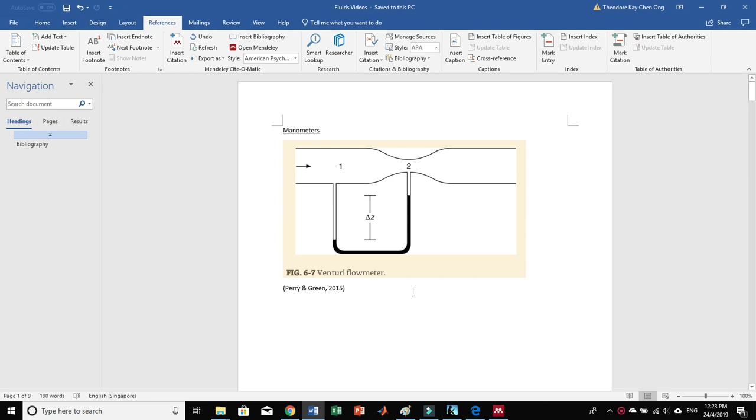I assume you should already have some experience with it, and that the pressure here should be equal to the pressure here. This should be pretty straightforward, part of the prerequisite knowledge, but this is just a recap of how to read manometers in case you don't know. If you already know, you can skip, and if you're not interested in the example problems for exams, you can also skip.

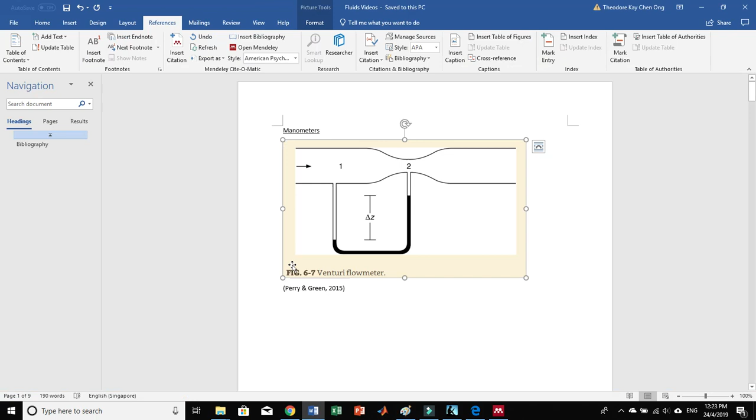So I took this from Perry's, as I was saying before. To read it, I'll draw one straight line across here, and say the pressure here equals the pressure here.

So what's the pressure at point 1? The pressure at 1 equals the pressure at 2, since the pressure here equals the pressure there, plus rho g delta z of this dark colored fluid.

This is of course assuming that the pressure in the flowing fluid is negligible, or rather the density of the flowing fluid is negligible compared to P1, P2.

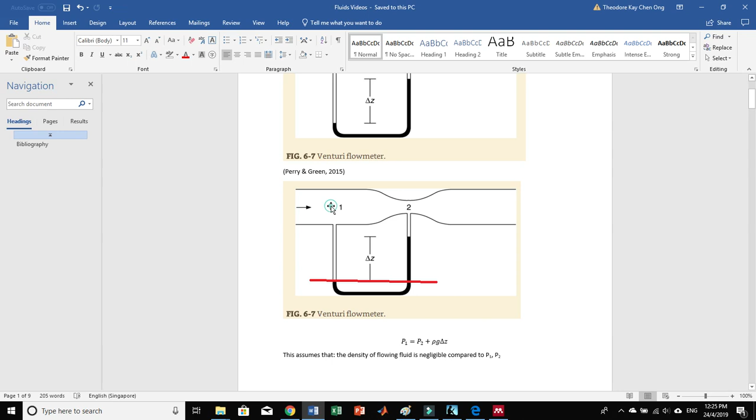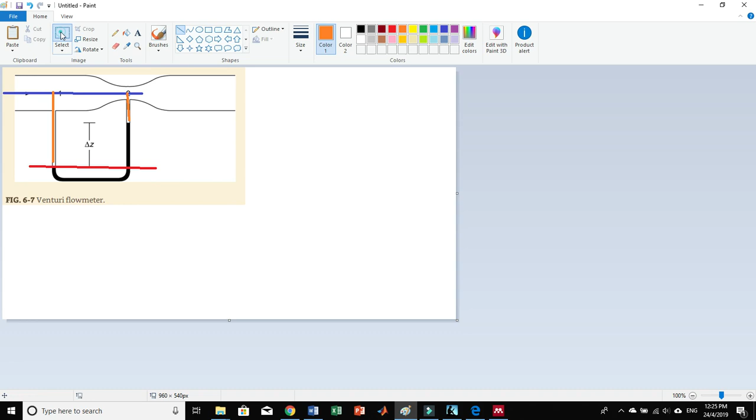Of course, if this flowing fluid was water and this dark fluid is mercury, then you may want to factor in some of the fluid height from here to here. So I'm going to draw a line from here to here, and then we'll want to consider the fluid height here and the fluid height here if the density of this flowing fluid is not negligible.

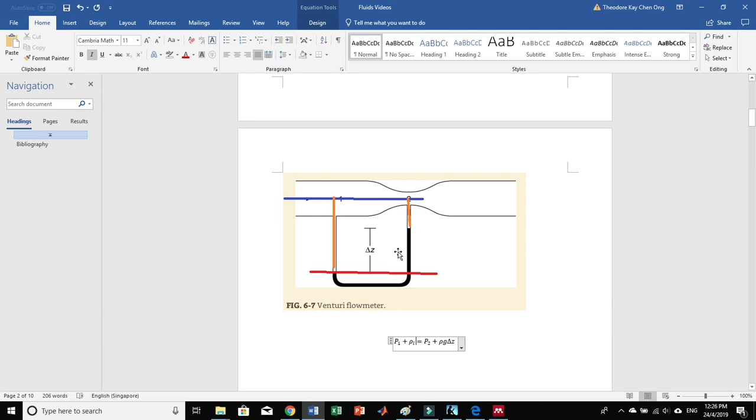So we'll add rho g times L1 and L2. If the fluid density is not negligible, I'll write rho L, where rho L is this fluid's density, not the dark fluid density, times G times L1, and here I'll just write rho G L2.

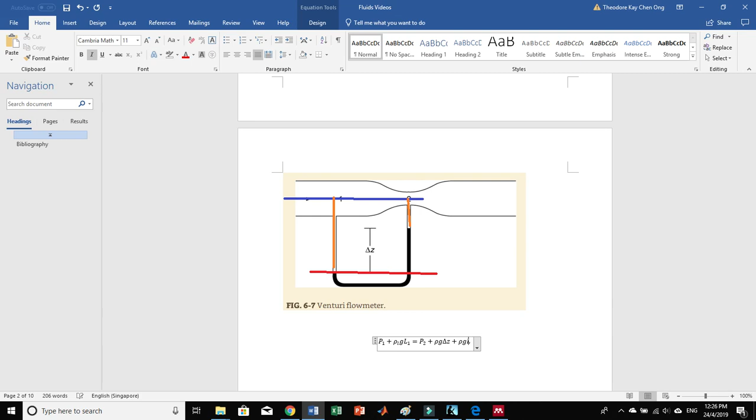That's it. This is the basic idea of how we want to read manometers. If you don't want to look at the example problem I found on the internet, you can forget it; otherwise, you can continue.

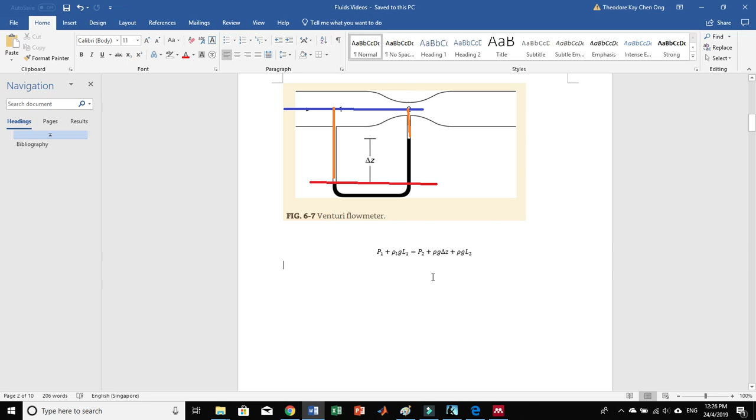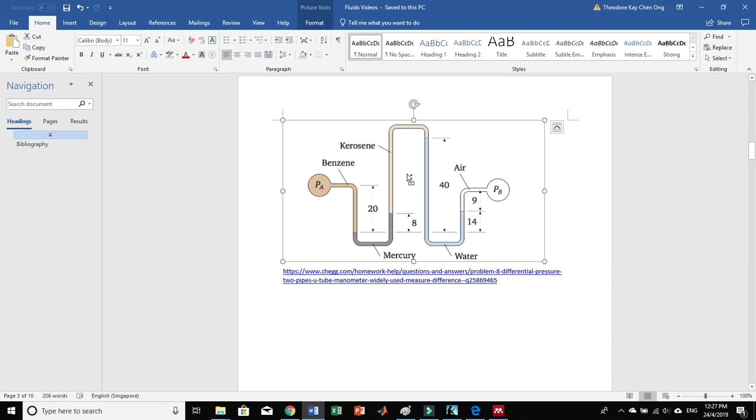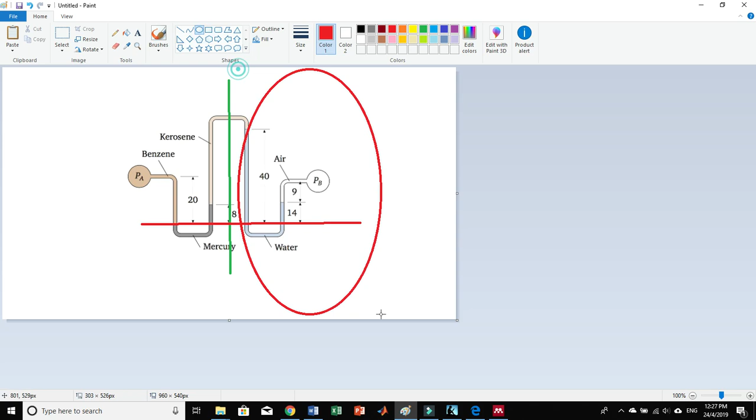First, we want to break this problem down into sections. I'm going to draw a green line and a red line. I'm not going to look at this portion first; I'm just going to take a look here, where I'm circling, so I'll copy and paste.

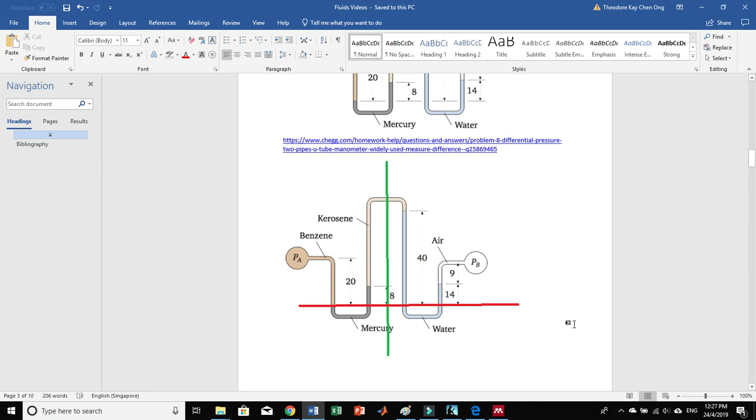Let's consider the mercury pressure balance on the left side. What is over here? We have 20 cm of benzene, all in centimeters, plus Pa, plus 20 cm times G times rho benzene.

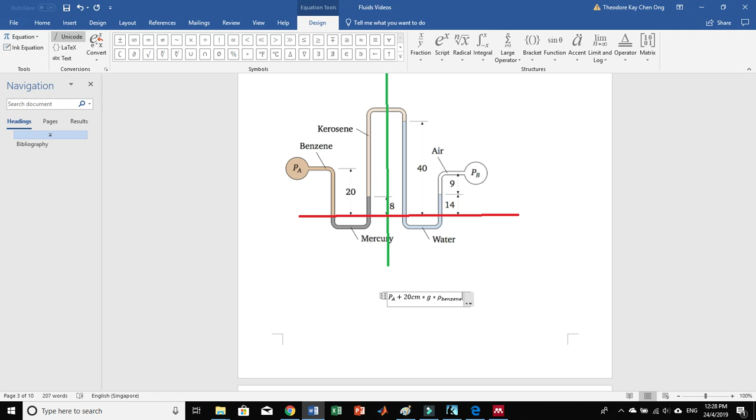So what's over here? Here we have some mercury, which is 8 cm of mercury, so let's write 8 cm times rho merc times G, plus there's some kerosene here.

Now, what is the height do we want to compare? If we take a look, there is this line here where there's some water, and we can use this as a reference point.

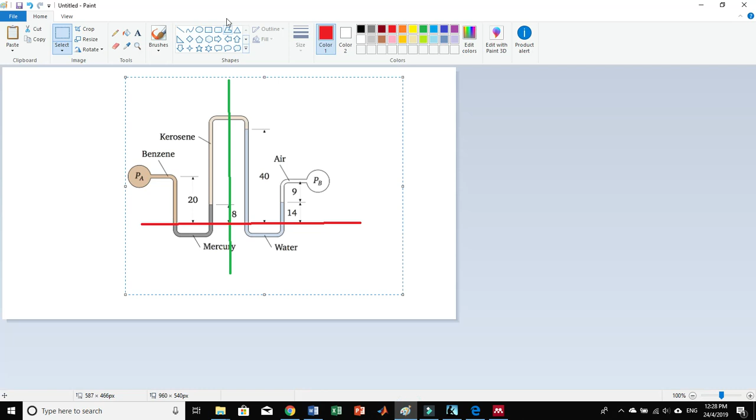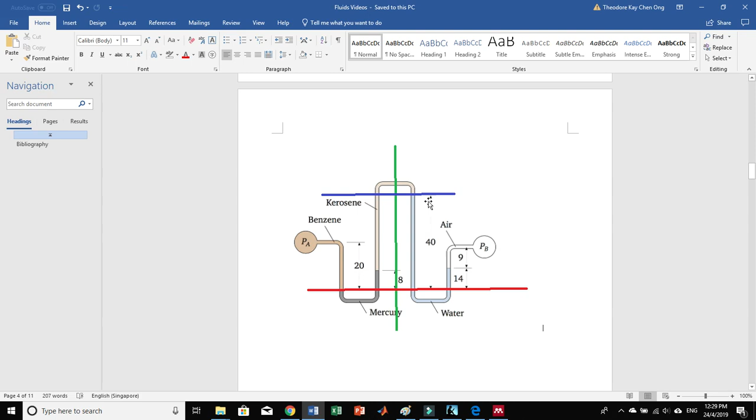I'll quickly go through this example. We can use this blue line as a reference point. We'll have 40 cm here, 8 cm here, so there is 32 cm of kerosene. So I'm going to write 32 cm times G times rho kero.

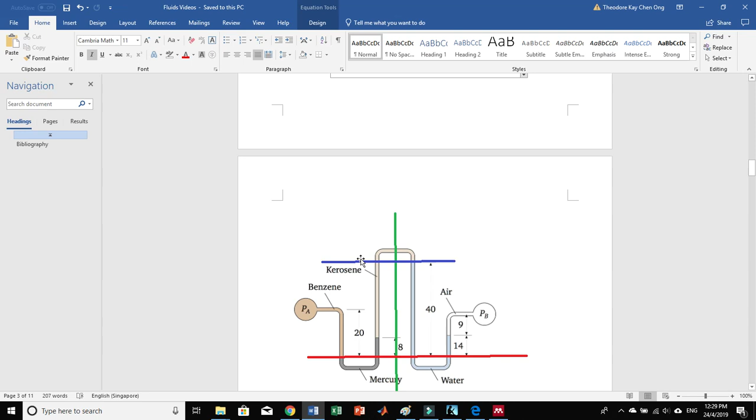Is that the end? Not quite. Over here there is some pressure which we don't know, so I'm just going to call the pressure at this blue line P kero, or P blue. We're going to paste this equation here.

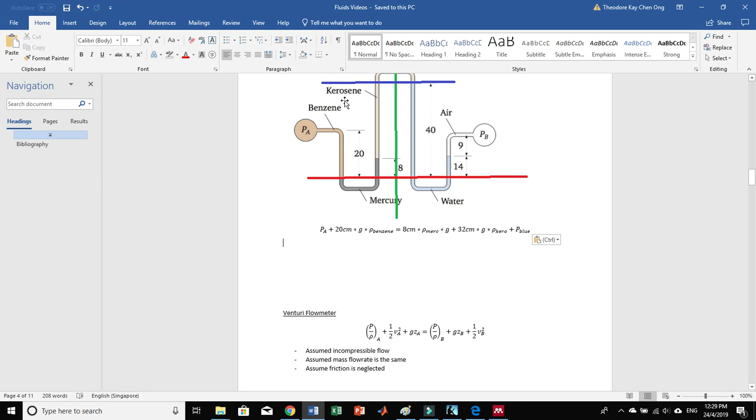That's for the left hand side. Now what is the right hand side? We have 40 cm of water plus P blue. If you look at this red line on the water, it's going to be 40 cm plus P blue, whatever is at this blue line, so P blue plus 40 cm times G times rho water.

So this is this side. Then we will have 14 cm of water plus PB equals 14 cm times G times rho water plus PA, sorry, PB. This is PB.

So if we just subtract this out, we minus 14 G rho water on both sides, we just get 26, since 40 minus 14 gives us 26. So that will give us PB. So how do we find PA in terms of PB, or PB in terms of PA?

Now we see this equation I'm highlighting in blue, and this one in green. We see that P blue is represented on both sides, so I'm going to solve these two simultaneously to get PB and PA in the same equation.

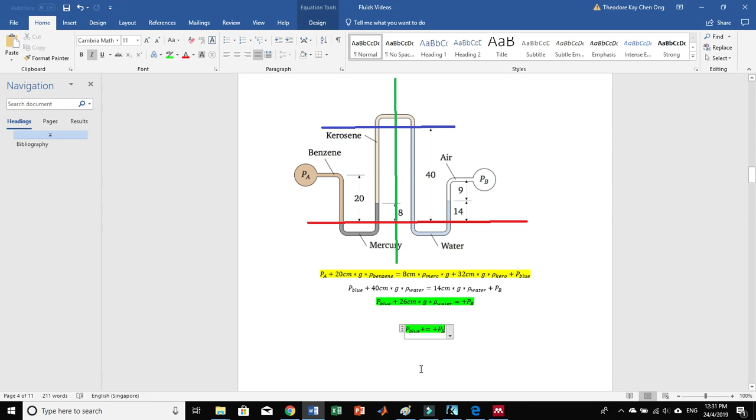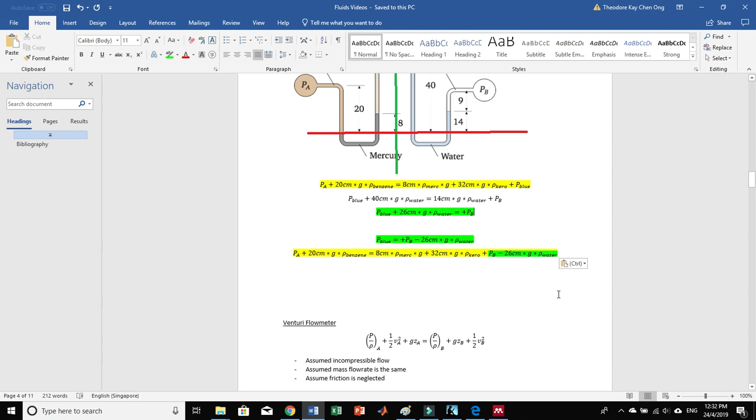Alright, so I've rearranged to find P blue, and I'm going to write P blue here, or rather copy and then paste. So if we have exam problems where we want to find some missing pressures or some density in terms of these pressures, we can use this equation quite simply, and that's how we solve what we want to find.

Let's say if you want to find what PA is, we shift everything over here. Of course, I made an assumption because the density of air is like 1000 times less than water, so I did not include this 9 cm of air. If you want to include that 9 cm of air, if the air is very dense for some reason, which it should not be, we usually neglect the density of air in comparison to liquids. We can do it as well, but we'll see it doesn't change the answer much, so we neglect it. That's all I have for you on manometers.

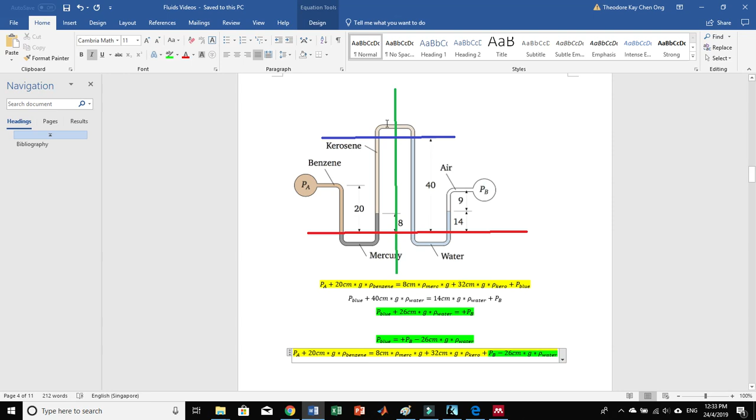So we have gone through a refresher course on how we should be reading manometers and one example problem. That's all I have for you this video. See you next time.